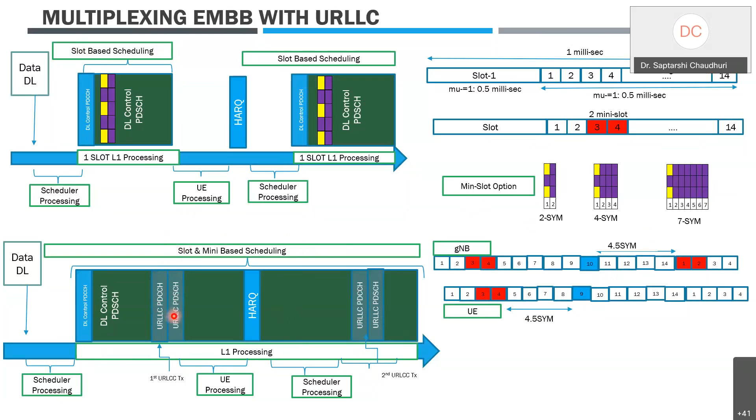Now imagine I have two traffic types: one going with slot level scheduling, and another going with slot and mini slot. It's a complex architecture we're solving, and consistent enough to maintain quality of service for this URLLC. So this is the important aspect.

Now from the product point of view, when we launch a product, it has the base hardware we choose, and the layer 1 aspect of it. I'm talking about the RAN management application and the radio defined protocols from the 3GPP point of view. At the heart of these things, you can see the broad aspect of it.

There are so many things that go into radio access itself, where we do the radio management protocol with respect to static and dynamic pooling that we need to solve. That's what I talked about earlier - whether we do puncturing based on static or dynamic pooling aspects. This has to be controlled by an algorithm firing at the right point. I cannot wait milliseconds and milliseconds for this algorithm; it has to be much more adaptive and dynamic. The core set definition and design is pre-configured with respect to handling these two traffic aspects.

With respect to the channel state feedback, that has to be dynamic enough to get into the slot. There are certain aspects of slicing coexistence that have to be taken care of, because if URLLC and eMBB has to work with LTE, the puncturing of LTE has to be done in the same green color grid. A lot of things have to be done there.

Scheduler is an important aspect, and you can see the points in these two entities, the schedulers, are growing every day, because the loading on this monolithic entity called the scheduler is increasing. It handles not only basic transmission resource allocation and quality of service awareness, but leaving aside URLLC, also intelligent switching, rate matching, MIMO, beam management, and now we've added this yellow color called URLLC. The scheduler has to handle so many things, plus engage with URLLC traffic in mini slot scheduling. These are the humongous tasks loading on the scheduler.

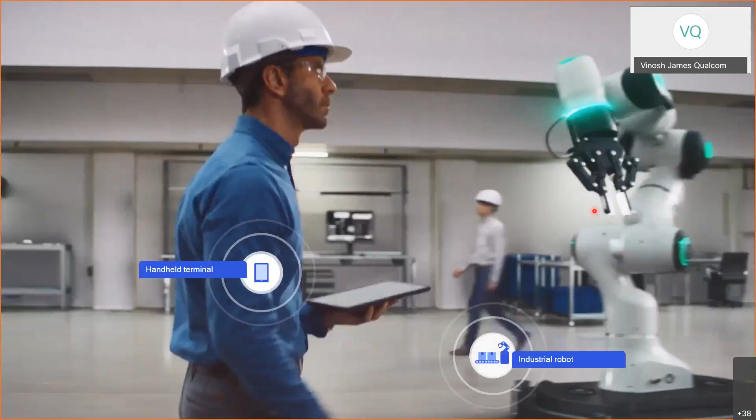Let's leave it at that particular point because these numbers always get us into tricky slopes. But let's move into the next part, trying to see how exactly a factory floor is actually going to look like. Yes, it's always a reconfigurable factory. That's how it is envisaged from the beginning.

So you have a lot of analytics happening, a lot of tools which will do tons of compute, connectivity, and other related processing. You have your handheld terminals, computer vision coming in because of all this monitoring, head-mounted displays which will have to do real-time processing by working with edge analytics concurrently. There are a lot of AGVs running on the ground, industrial robots which are super sensitive to how they calibrate and respond, and not to mention tons and tons of sensors falling into the IoT category. So this industry platform is like the perfect setup anyone can ask for.

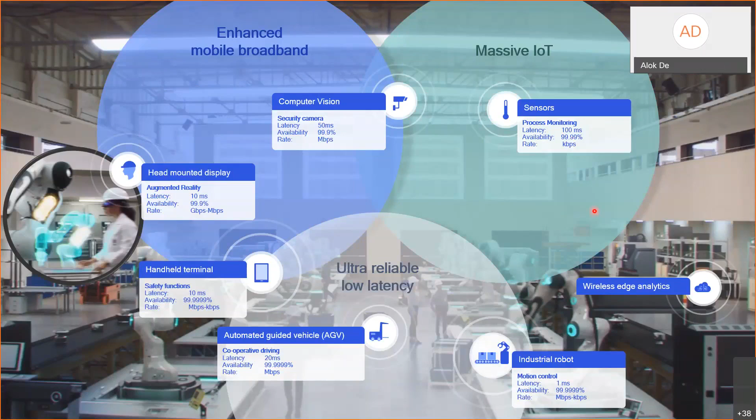Why 5G? So you have your traditional enhanced mobile broadband coming in through very high data rate, data guzzling applications like displays, head-mounted displays, handheld terminals and other related things. Cameras—think about how much data will have to be captured and then processed in real time. Industrial robots, same thing, you have to respond in the right time frame. So this is like the perfect setup, and for any engineering company focusing on technology enhancements, this proves to be the perfect opportunity.

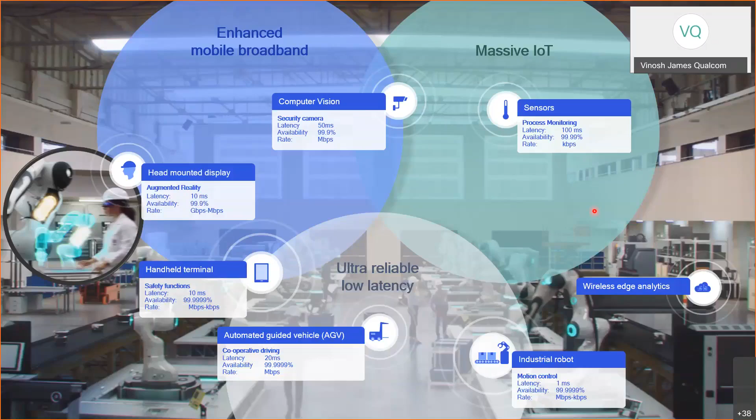To explain what exactly that opportunity is, 5G will merge with compute, and when it tries to bring in the secure environment for applications processing to happen, that's where the next opportunity is going to be. 5G, in our view, is going to take Industry 4.0 to the next level. It will be that single future-proof technology with a single waveform which is scalable, configurable for different applications, flexible, incorporating wireless Ethernet and other applications we want to do. Most importantly, edge processing and the security aspects we bring in. These three connected together form the ideal platform for any future activity that happens.

Building on top of this narrative, we talked about meeting industrial IoT requirements. So what are the key areas or aspects it needs to include? It will have to be as diverse as configuring 5G networks for private as well as public use. The spectrum we are dealing with will have to be under different folds, so there are always sensitivities. Industrial advanced countries like Germany, Korea, Japan were able to identify spectrum which can be dedicatedly used for this particular purpose in their own geographies.

But then you come to other territories, and there is always this friction—why should somebody who is not in the traditional public network offering be allowed to manage spectrum? So they want the flexibility to share spectrum between public and industry use cases. And the third category is, let this fight go on forever.

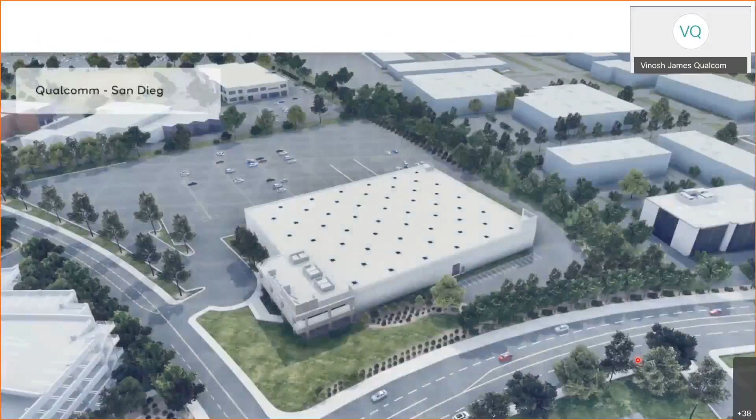Moving into another aspect, demonstrating time-sensitive network. This is something we did in our labs in San Diego. It explains how exactly TSN is critical for this particular operation. If you follow what is needed here, something moving on a conveyor belt is tracked by a camera. The instance is quickly reported to the back network. The robot, which is an industry robot on the factory floor, quickly senses it. So whatever intelligence was shared through the camera is supposed to be responded to by the robot by the time it actually reaches that point.

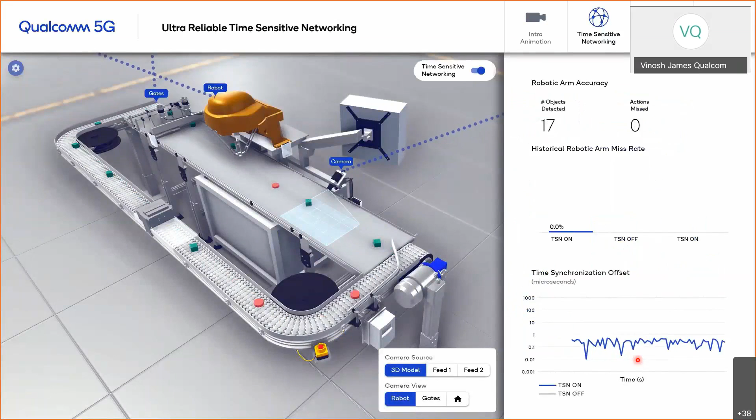Based on how it actually was approved, it makes a decision on which way it will have to move. Let's focus on what happens on the same floor when TSN is enabled and when TSN is disabled. As a rule of thumb, you put the green color boxes to the left and the red color ones to the right.

When 5G with TSN was enabled, the camera sensed it, went real time to the core network, processed it. The edge cloud was able to do some response, give it back to the industrial robot, and it was able to quickly sort out. Switch off TSN, and that aspect of the 5G and Ethernet actually went missing.

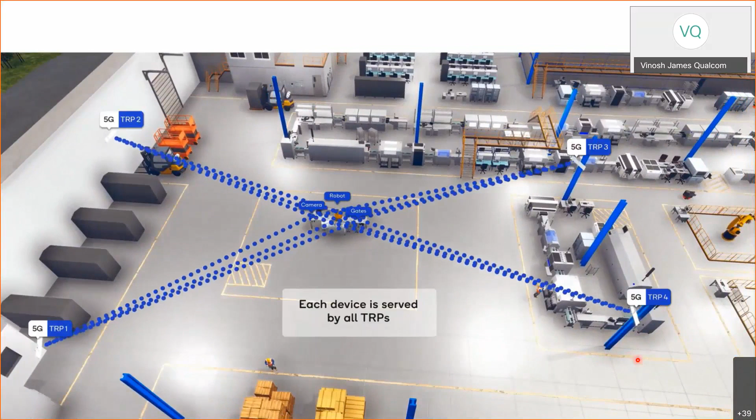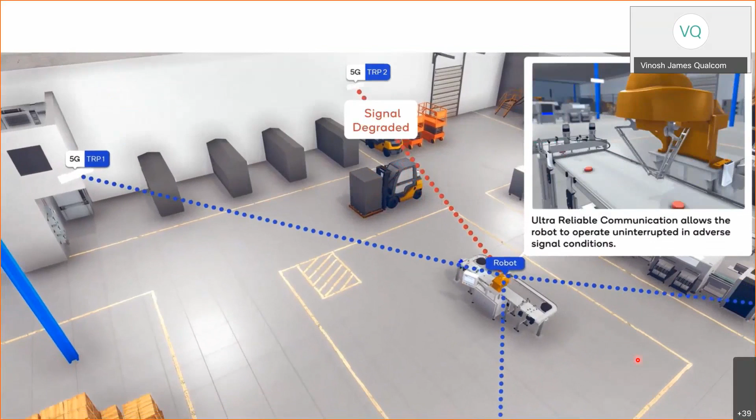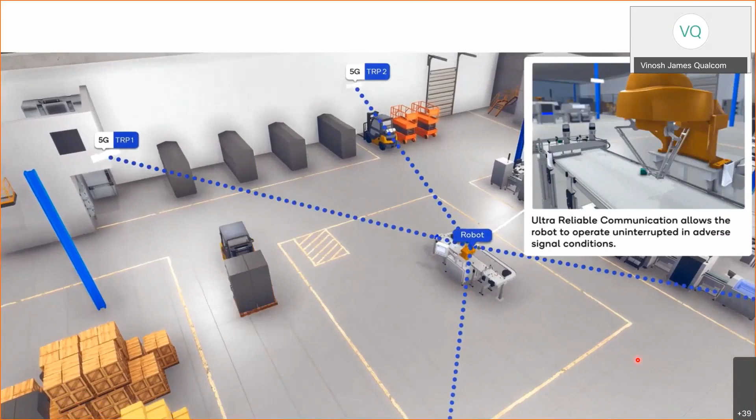Moving into the next slide, demonstrating URLLC capabilities on where exactly this is needed. The AGV running on the floor will have to be managed in this particular floor. The robot is now served by 4 transmission reception points. The AGV moving degrades the signal from these TRPs. If we are to serve with only a dedicated TRP for that particular industrial machinery, you are going to be put in outage at certain points in time, which will slip the way the network would be deployed.

In case you are noticing or not noticing, this is already a reconfigurable factory, no wires, nothing, just layouts where all these things need to be positioned so that quickly some things can be done.

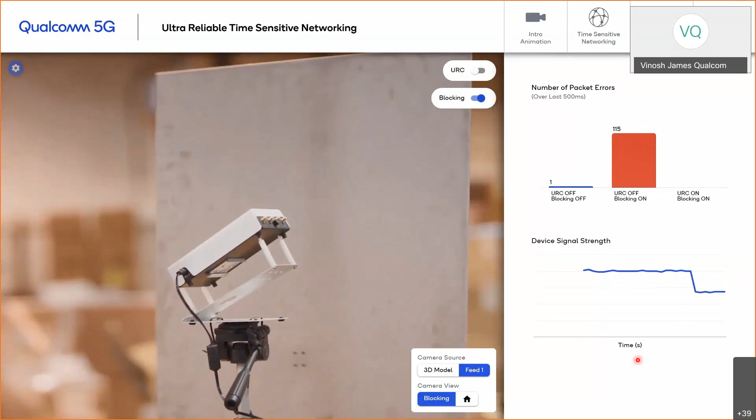This is just explaining what happens if you move a metal sheet between the sensor and the TRP pair. You can see the signal degrading towards the right and how badly it influences the signal quality reception.

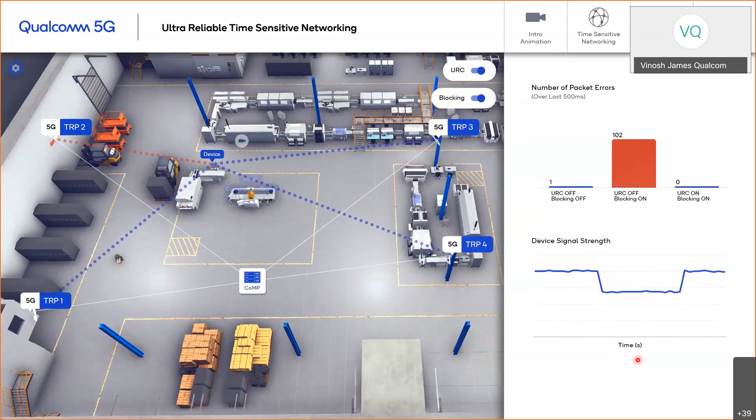So I think the bottom line message I wanted you to take away is Release 16 already offers the flexibility for reconfigurable factories, trying to deploy URLLC, massive eMBB, and massive IoT functionalities for the industry to leverage.

There will be tons of use cases that will come in, which will mean there will be very focused services and focused use cases that will have to be provided. How exactly we'll do that is where the innovation comes in, and that's where a lot of new industry players getting into this ecosystem will benefit from. And that's precisely where that 5 trillion dollar worth of economic activity is expected to come and add value.

This last one from my end will demonstrate the indoor precise positioning performance. It's not only about 2D, it's also about the third dimension, elevation, all thanks to the enhancements to positioning accuracy benefits that went into Release 15 and Release 16 of the 3GPP technology.

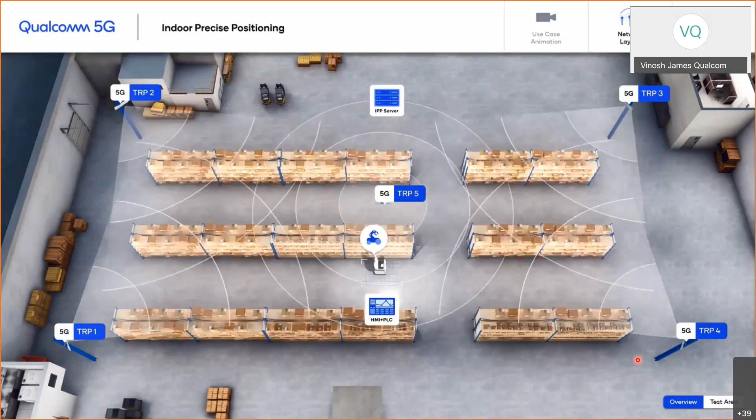Just to put in perspective, the entire factory floor deployed had just 5 5G TRPs, but that was sufficiently well positioned to manage the entire floor, to handle the 2D accuracy as well as the elevation. The core was again close to the network, so we can call it like a private network in that perspective.

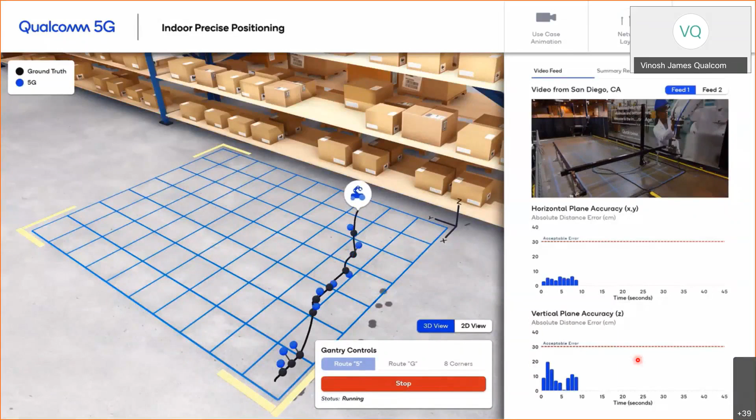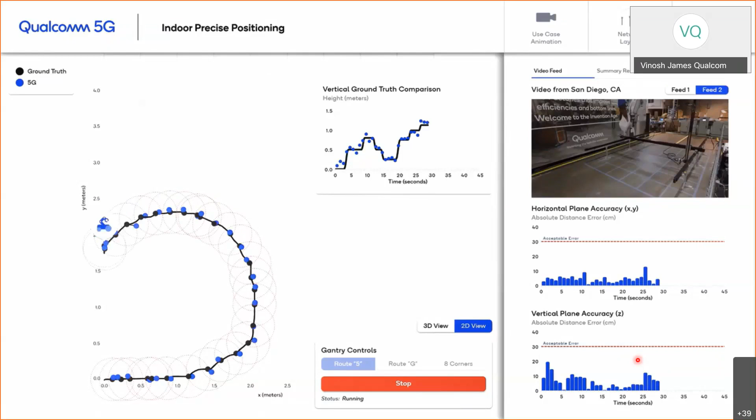With that, I don't have much new things to add. So thank you for listening. If there are questions, I can take them. Otherwise, I'm good. Back to you.

Thank you, Dr. Vinosh, for that excellent session on time sensitive networking, and how 5G and URLLC would be a game changer for Industry 4.0 and industrial automation. We do have one question here by Dr. Naveen, who asks whether it will be cost effective for small and medium industry or manufacturing industry.

Okay, let me try to answer this question. So, it's obviously—my favorite phrase is: you need to do a cost-benefit analysis.

The benefit which actually comes from here is that you don't have to have a dedicated factory floor focusing on one specific purpose. You're actually focusing on new use cases. You can reconfigure your factory, right? Simple things like you can actually have different output products which can go away from the industry floor during the morning, afternoon, and evening. The equivalent of saying I had different food for breakfast, lunch, and dinner, which is not possible with today's industries.

If you're talking about the connectivity aspect, very simple things. You have devices, which is anyway something you are going to procure. And the TRPs which we had put together, if I'm not mistaken, Professor Naveen's lab already has that capability. Two weeks back when we had a conversation with him, he was explaining how one of his students is putting together an open source network using 3GPP technology.

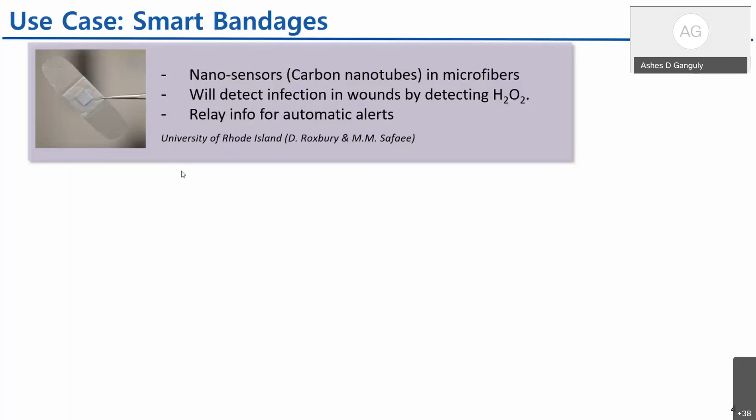This is already in prototype phase. The key thing there was the automatic alerts, which once again is the connectivity piece that comes into the picture.

These are just some examples of what's going on, and it's going to be pervasive. The number of sensors is going to increase, which will make this ability of having this very dense set of devices, being able to send back information to a central hospital or whoever is the doctor on the other side, and able to get it reliably - that's going to be very important.

3 months later, in March 2019, once again in China, this was done by the Chinese PLA General Hospital, from Sanya city to a patient in Beijing, 3,000 kilometers away. A surgeon actually implanted a device in the brain of a human patient with Parkinson's disease. I could not find any pictures of that, just the report was available on the media that it was fully successful with the best possible latency and all of that. So if the question is what is possible, here's your answer, that the future is kind of already here.

Of course, it is not widespread. It's only coming up in pockets, and China seems to be a big leader in this deployment part. But yeah, it's going on.

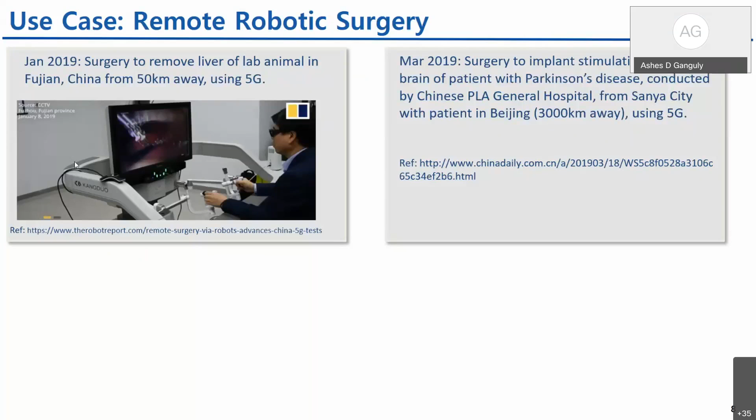Coming to India, in September 2019, Apex Heart Institute in Gujarat did robotic cardiac intervention surgeries. This was done by Dr. Tejas Patel. He did 5 surgeries one after the other, and they were all deemed very successful. This was not using 5G, but over a wired connection, from 20 kilometers away, and it was deemed a success. All 5 patients recovered successfully. The operation was very successful - a demonstration of what is possible.

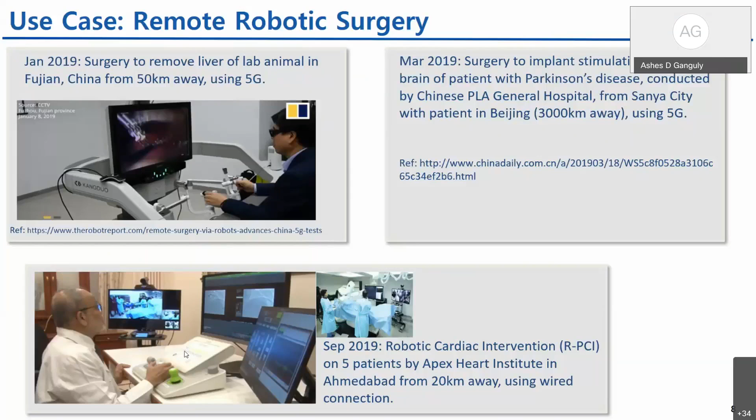So here's where, once 5G deployment happens at large scale, all of these things will become possible. That's where we are moving forward. This is, I would say, the big impact use case for going to this reliable, low latency approach - doing remote surgery successfully, getting high resolution images, getting proper haptic feedback, and of course sending the commands across as well.

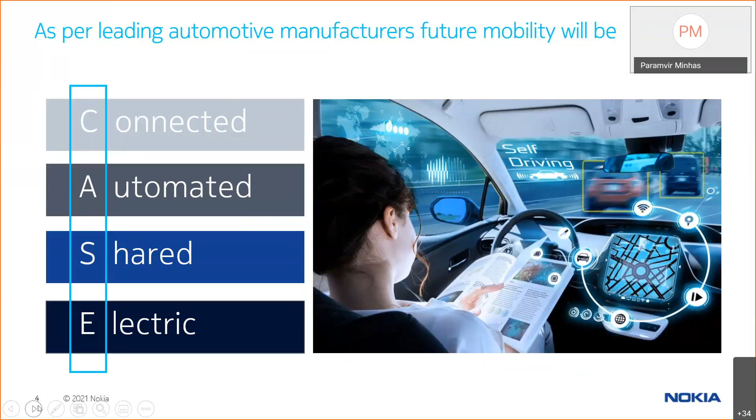And then automation is also coming from different other segments in this connected vehicle domain. The shared part, already we have Olas and Ubers, this vehicle as a service, like what we already do. And electric is kind of electric vehicles to reduce the carbon footprint. So I think these are the main themes, and we basically try to see what is the overall impact in different directions we see in the domain.

And I think we are somewhere in the midpoint in today's domain, with 2020 or 2021 at the cusp of it. We basically have Teslas and other vehicles promoting hands-off driving and all that. But I think we are still 4 or 5 years away from having fully autonomous vehicles down the line, where telecommunication standards, spectrum, and other things will play an important role for these connected vehicles.